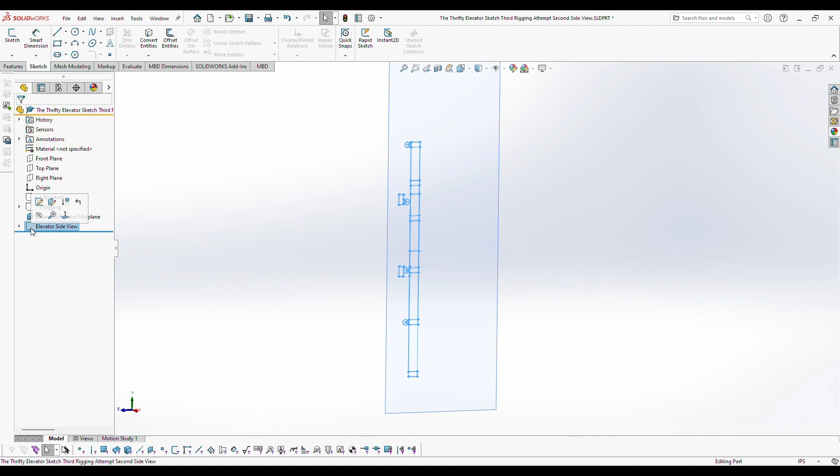We're several videos in at this point and still have not put any solids in this part, and that's about to change finally. So, as we've done before, first thing is to come into the main structure sketch, and we're going to shrink it down and extend this elevator, go even shorter, because that'll make it easier to create the structure without pieces overlapping.

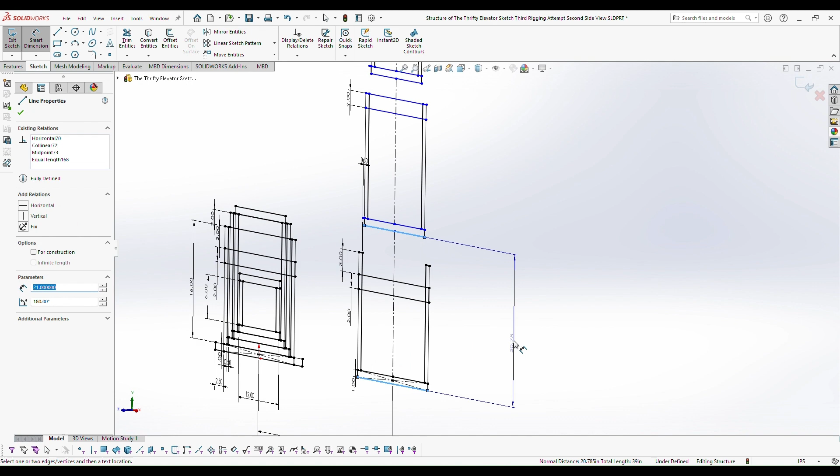Let's show our original sketches here. Actually, we can hide rigging for a moment. So there's our side view. You can almost kind of see when you rotate it what the elevator is going to look like.

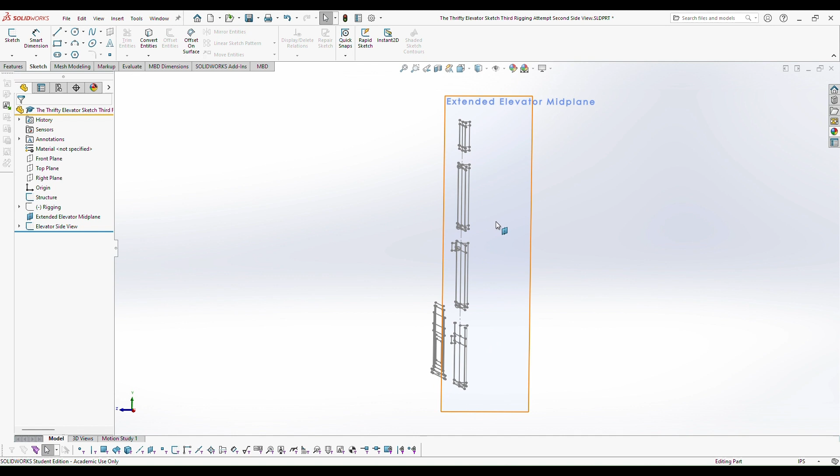Just like with the chassis, if you've seen the chassis video, we're going to make a part where we insert this into a part. So File, Part, Insert Part. We'll choose this Thrifty elevator sketch. Do not need solid bodies, but we do need the sketches. The next thing we need to do is we do not need to locate it. It's located at the origin.

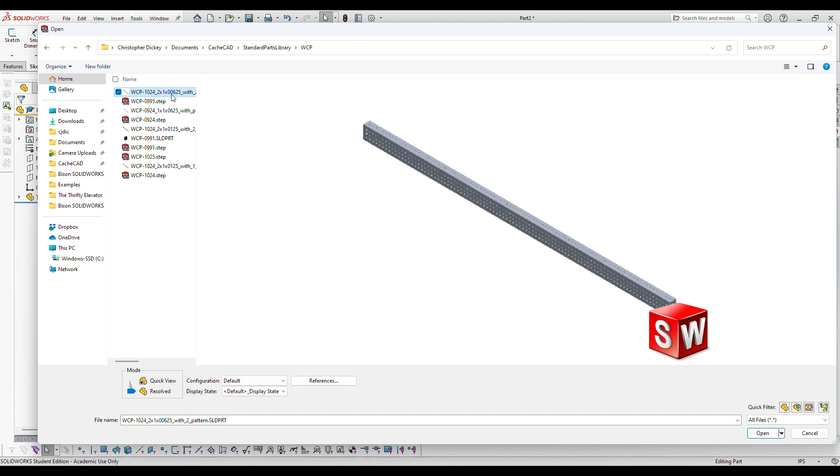We need to insert the tubes that we're going to use to make the structure. Tubes which I do not have open, but you can find in this case I'm going to use the West Coast products. Okay, here we go. Yeah, it's a 2x1 by 0.0625 inches with the 2-inch pattern. So it's plain old 16th inch wall tube, as you can see, with a pattern on all sides. That makes it easy to attach.

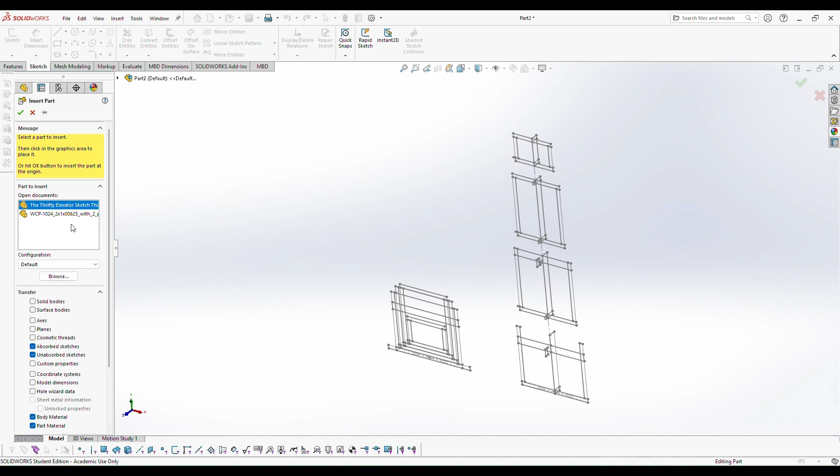So come back into our new part, and we're going to do Insert Part. Choose the tube. We need the solid bodies, we do not need the sketches, and we do want the material. And we also want to make sure that Locate with Move Copy feature is checked.

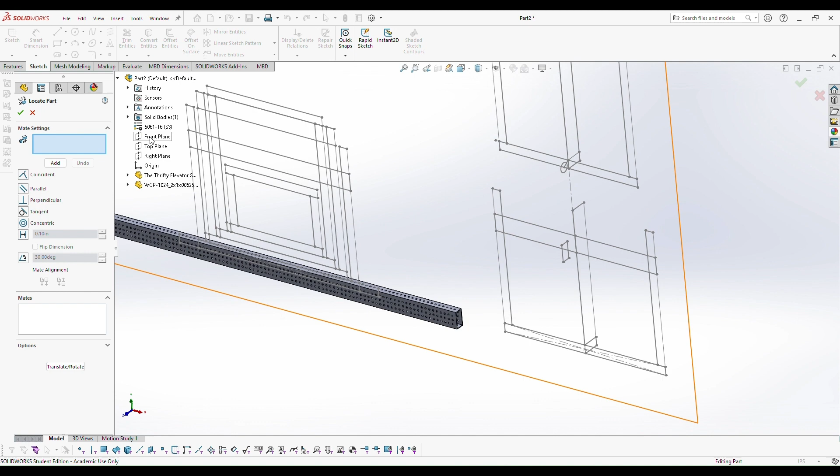So, first thing is, the front plane is what we sketched this on. So we're going to do the front plane to this part of the tube. So that's going the wrong way. Flip the mate alignment. Good. Add this. We want this line here to this line here. And we want this line here to this line here.

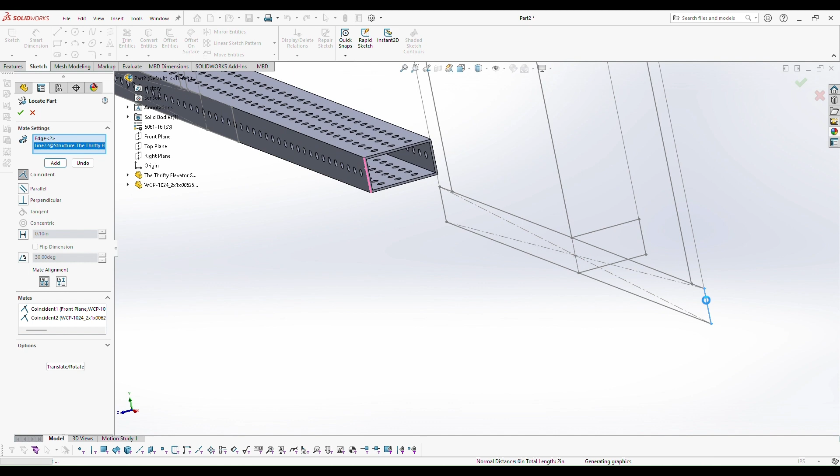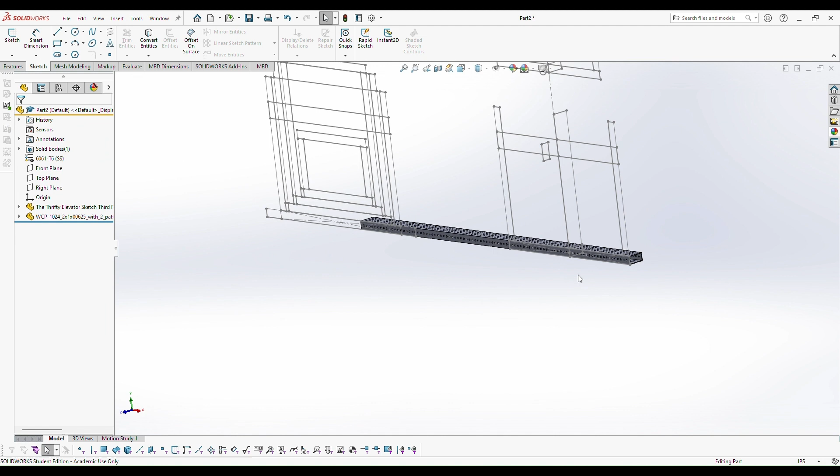Okay, and actually, I neglected something from a previous time. The Thrifty bot for the motor mounting requires this extra bit of tube hanging out over the ends. So we're going to need to add that. Now let me show you how you change this when you do that. I'm going to go back to the sketch. I added it on this front view, I didn't add it on the expanded front view.

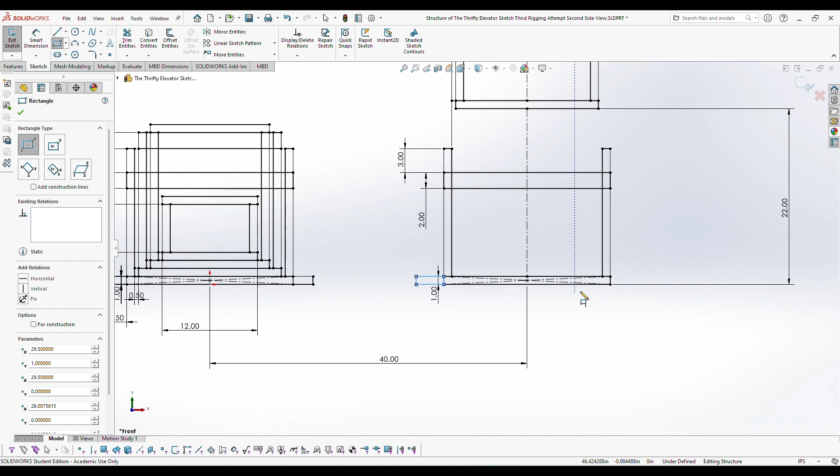So edit the rigging, or edit the structure sketch. And you can't actually easily extend this rectangle. These points are merged on, so it is what it is. But you can pretty easily just drop a couple more rectangles on the side here. And we will set all of these equal to this. Thrifty says 2.5 inches coming out the side.

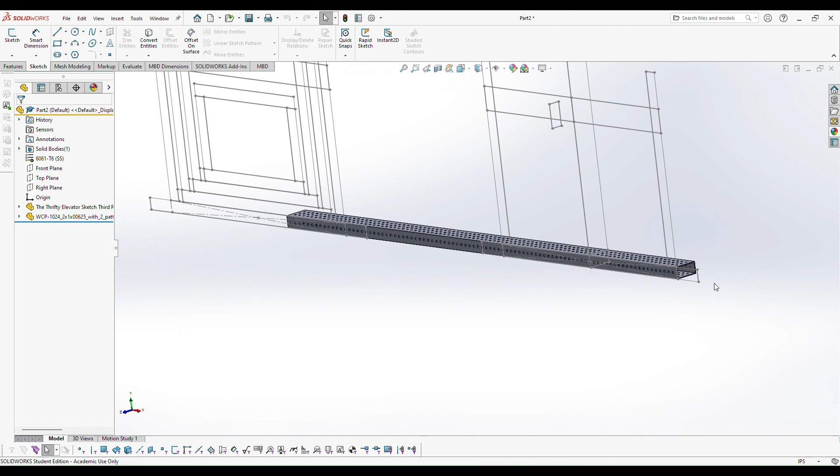We'll come back into our part. It'll update. You see the sketch has updated to include that.

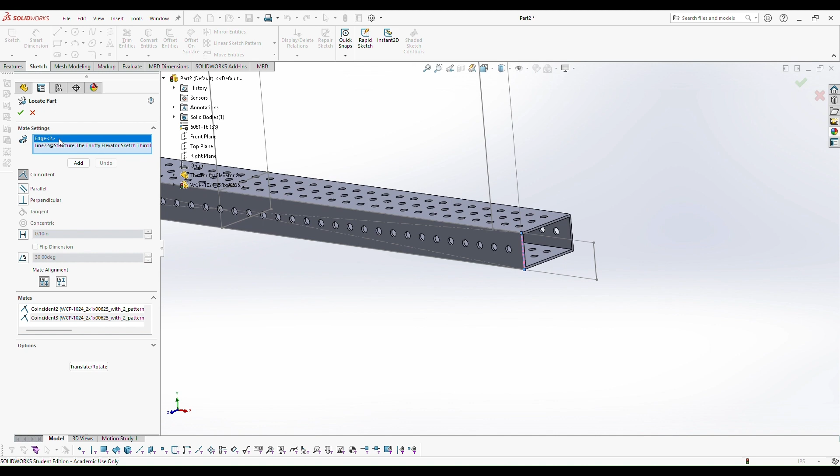And then the way that you edit where it's, quote, mated to, is you edit feature on the tube. Yes, we want to keep this the same. And again, it goes into this mates. So this mate is fine, this mate is fine, this mate is the wrong place. So that we can see this, there's an edge. The edge is the part, and there's a line, and the line is what we want to get rid of. So right click, say delete, or you can use the delete key on your keyboard. Click here instead, and now we're all set. That's going to work. Hit add, hit check.

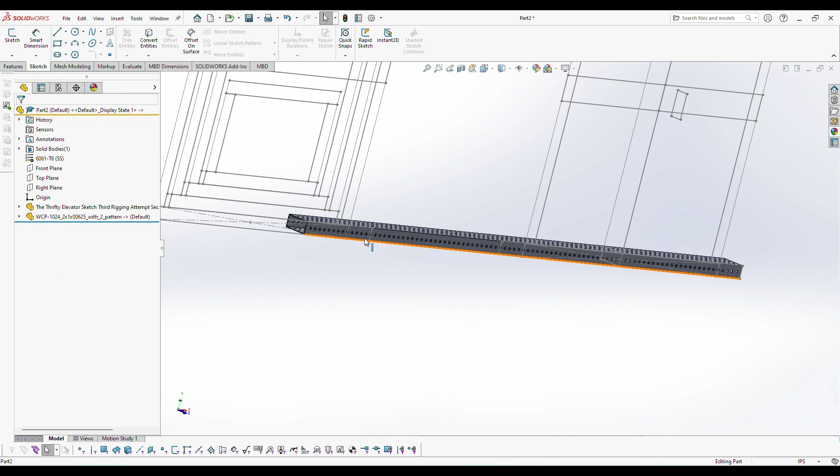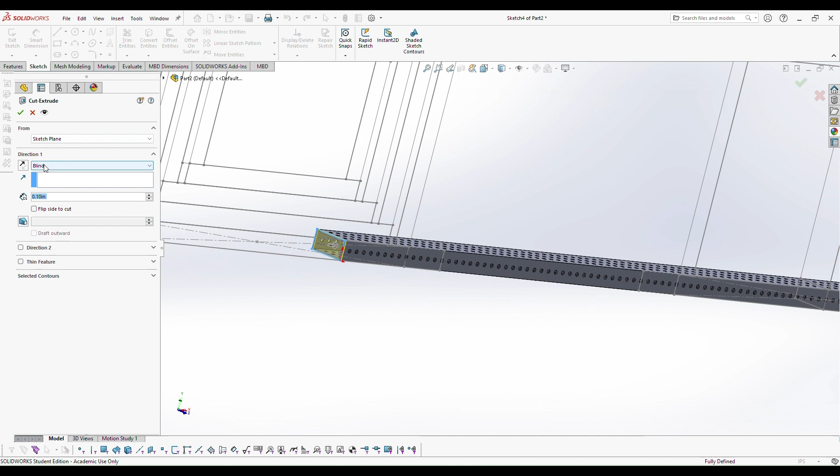Next step, just like with the chassis, we're going to cut extrude this. So click on this face, features, extruded cut, convert entities, we'll take this outer perimeter, bring it into the sketch. And then exit sketch will take us back into the cut extrude. For the distance, we want to choose up to vertex. And the vertex we're going to choose is going to be one of the points, one of the 2 points that indicate the end of that tube.

Okay, we got a bottom tube. Let's do another one. Insert part, insert another tube, solid bodies, part material. Actually, it's already got the material. Locate with move copy feature.

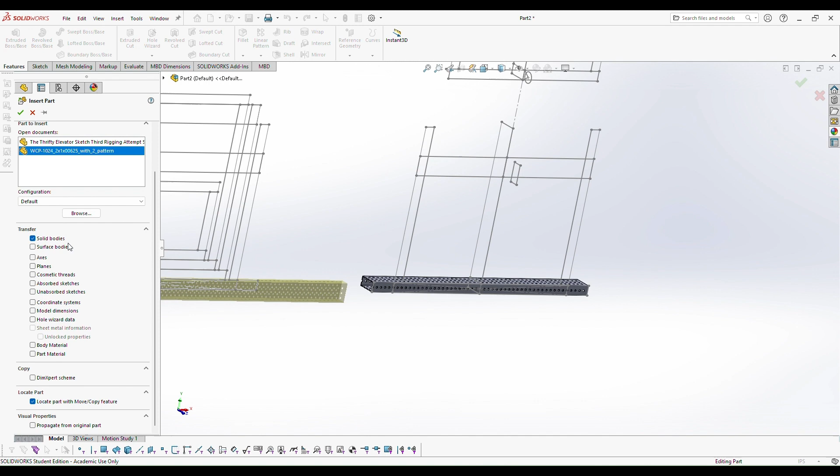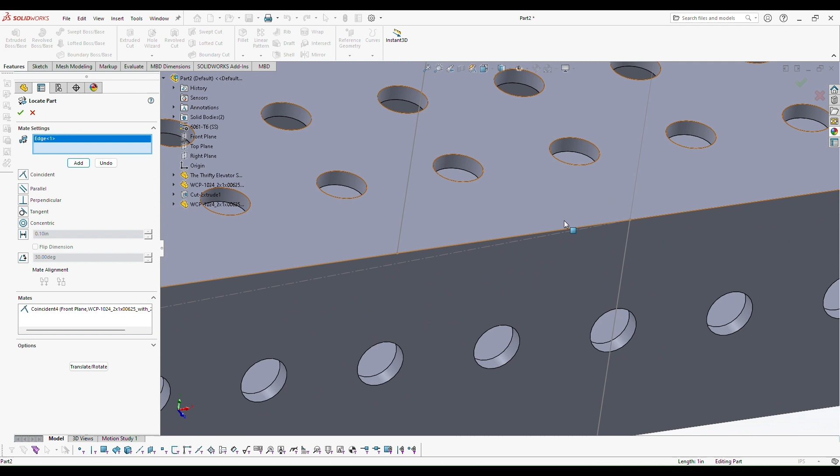So same deal here. Front plane goes to the face of the tube. It's put us backwards again. We'll flip it. Add. We'll pick this bottom line here to this line. Flip that upside down. Add. And then pick this line on the side along with this, the length. Add. And then we're done locating the part.

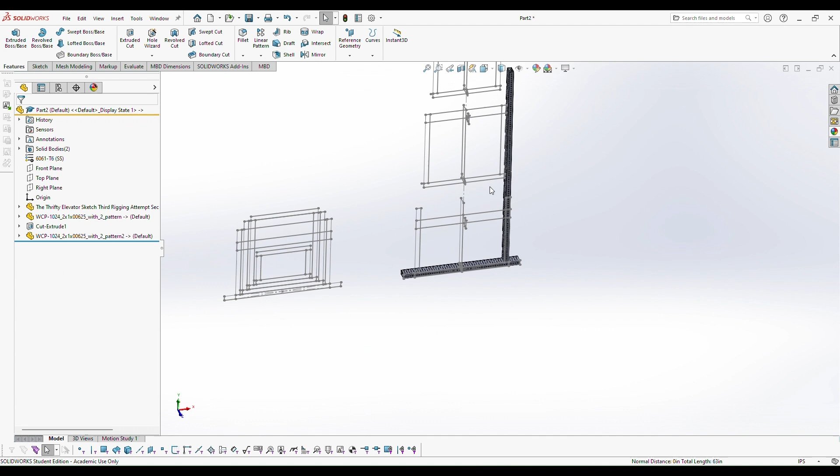Alright, now trim. Zoom in, click on the top face, extruded cut, convert entities, exit sketch. It should already come up with up to vertex because we did it last time. Choose a vertex. Good to go.

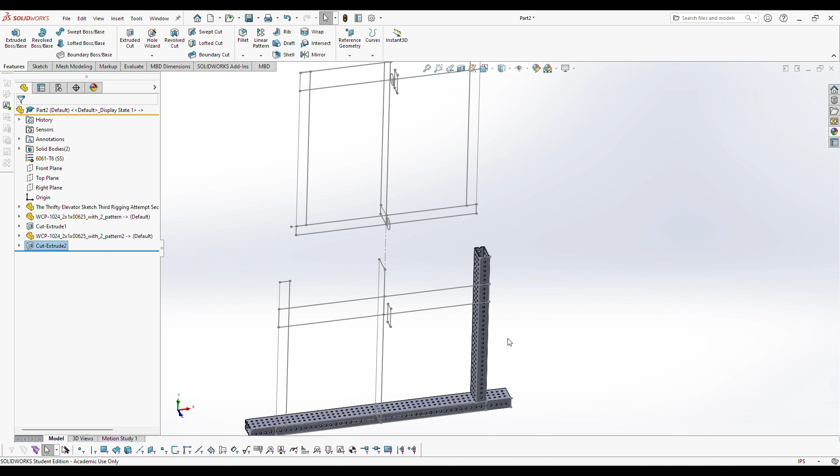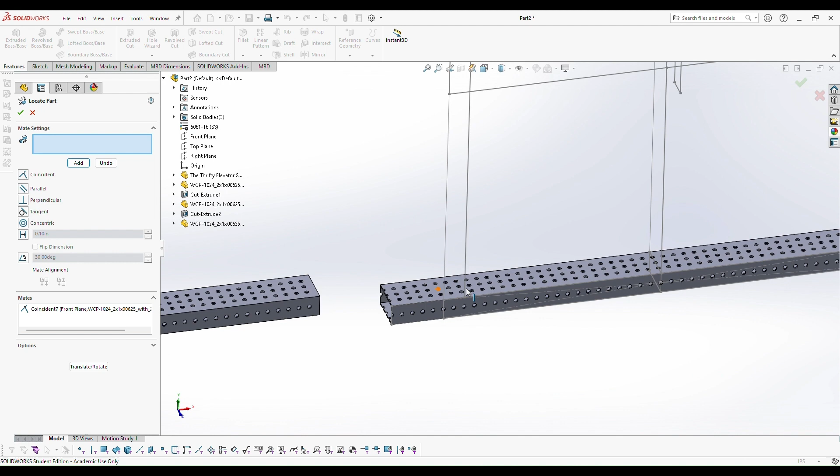Alright, once more on this side, and then we'll do the back bar. So insert part, this part, solid bodies only, locate with move copy feature. Front plane, top, flip mate alignment, add. Choose this line, flip the mate alignment on that one too, add. This line, this edge. That looks good. Check.

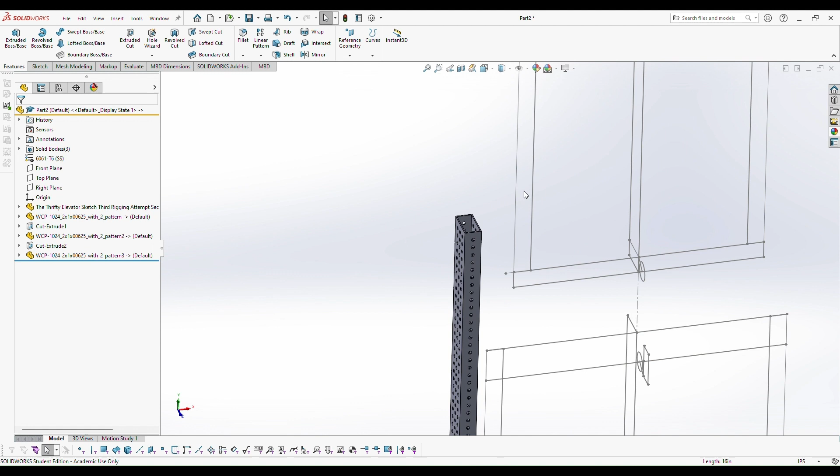Zoom into the top, select the top face, extruded cut, convert entities, exit sketch, up to vertex, and our vertex that we'll choose will be one of these. Finally, we've got our back bar.

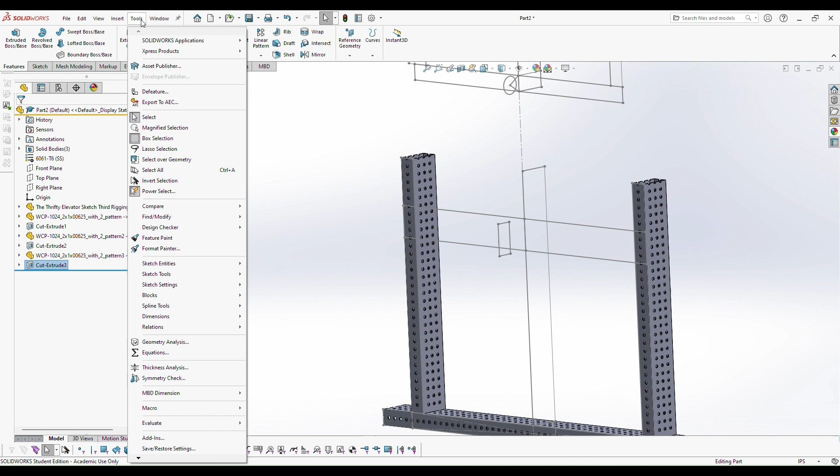So this is a little bit different. So insert part, same thing so far, locate with move copy feature. We are not going to make it coincident with the front plane. We will make it parallel to the front plane. Front plane here, this plane here, parallel, not coincident. Otherwise we can't set it in the right place. Add that.

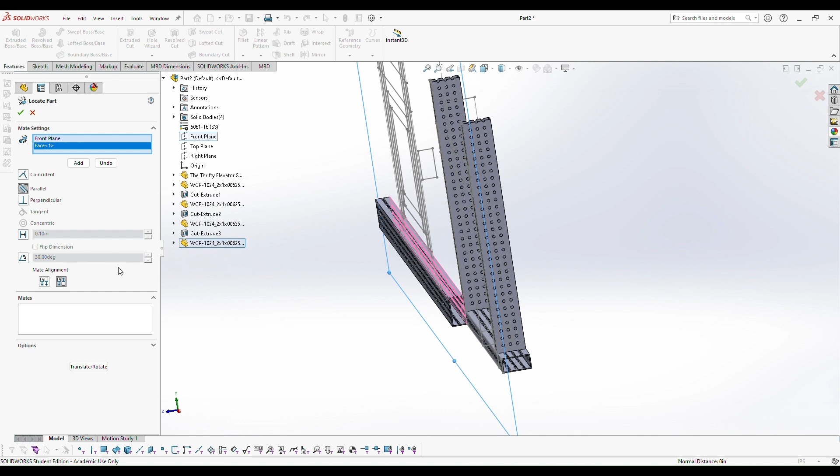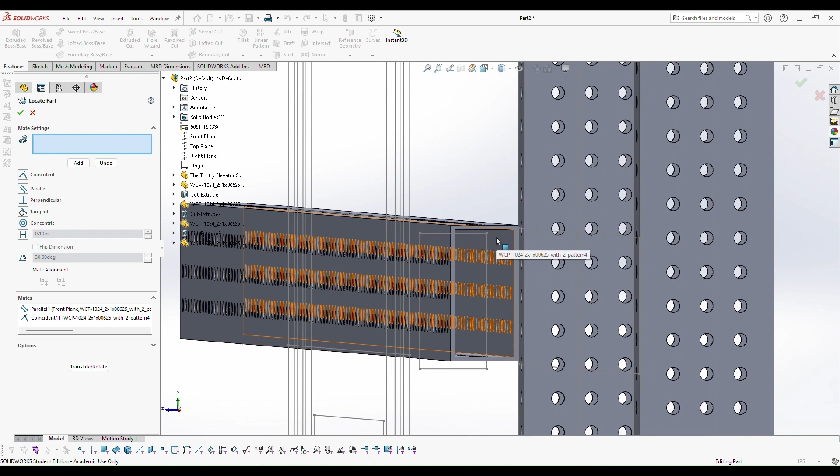We will make this face here coincident with this line. Even though it might be a little hard to see how that worked, it did actually work. It is coincident. Add. We'll do this face here. Boy, that's hard to see. This face here coincident with this line. Add.

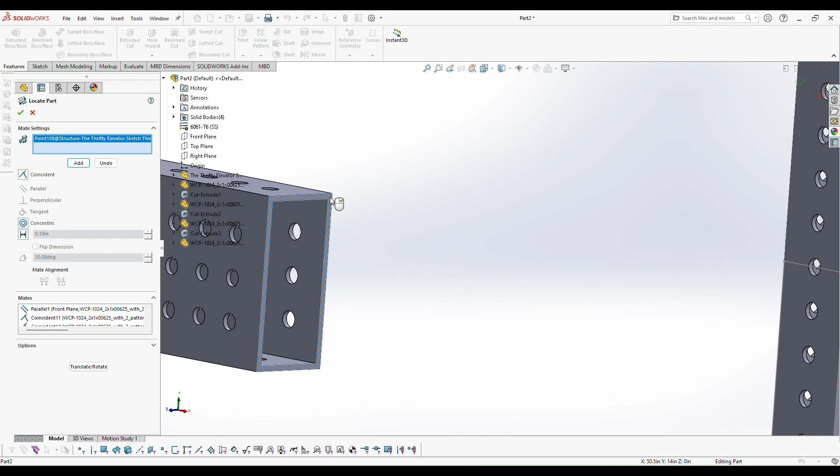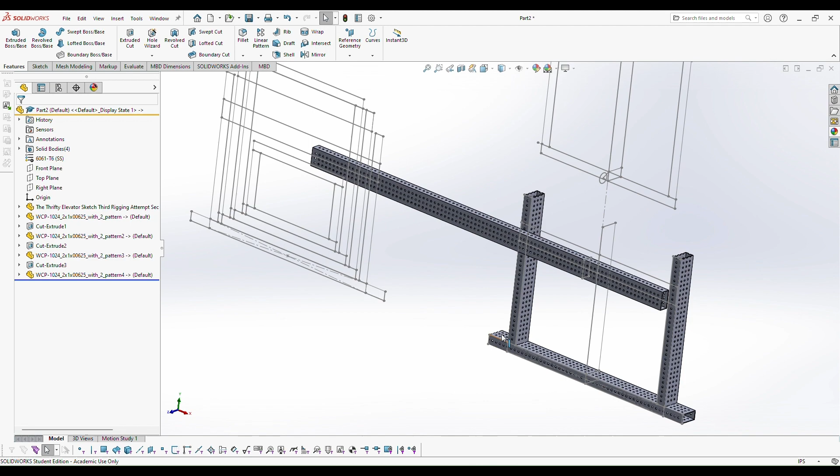And then we'll do this point here coincident with this face. That'll set the location this way. Add, and that should be good. Here's actually a question. Was I consistent with my direction? No, I was not consistent with my direction. So that's a little bit of a pain, but cross that bridge if we come to it.

Then last, extruded cut on that face, convert entities, exit sketch, and we'll choose our point here. And there we go. We've got our bottom structure of the elevator. Let's go ahead and save this.

Say, oop, that's the wrong place. Standard parts library examples. Stationary tubes.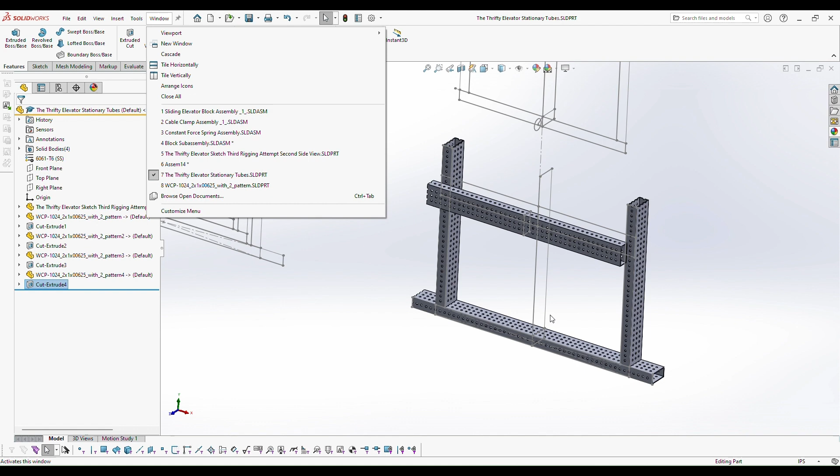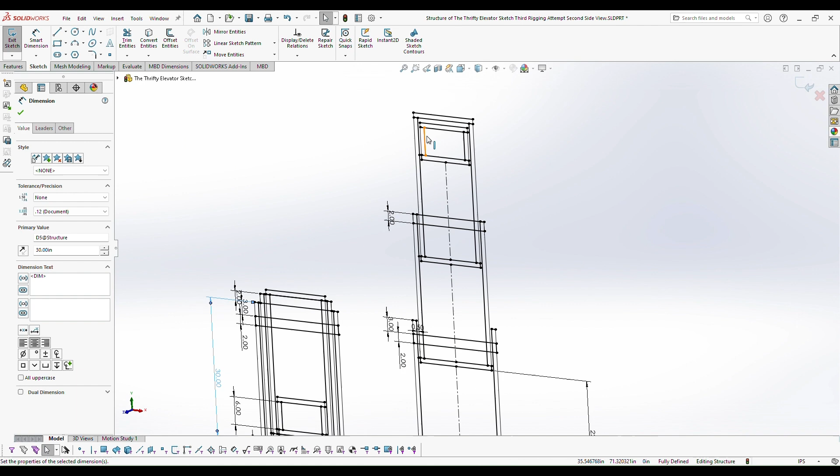Now, if we want to modify this, because obviously we probably don't want the elevator like that, go back into our sketch, edit the structure, and that's about reasonable. That looks good. Exit sketch. Go back into our stationary tubes, wait for it to rebuild, and it has rebuilt. So everything has adjusted and moved accordingly.